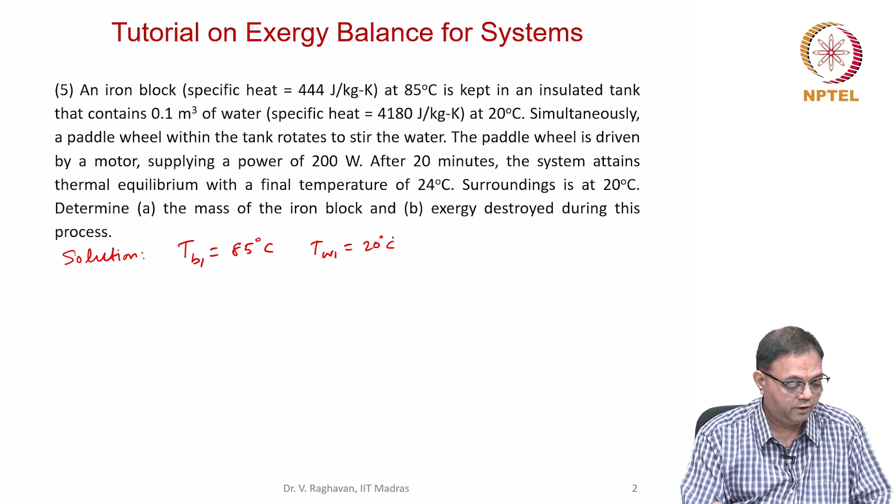The block's initial temperature is 85 degrees centigrade, the water's temperature is 20 degrees centigrade, the final temperature for both is 24 degrees centigrade and the ambient temperature is 20 degrees centigrade, and the volume is 0.1 meter cube, and the specific heats are given. For the block it is 444 joule per kg Kelvin, and for the water it is 4180 joule per kg Kelvin.

So, for the iron block, first law is applied, Q minus W equal to delta U, where it's insulated. So, the system is iron block plus water tank. Both together insulated, so Q equal to 0. So, minus W equal to delta U.

So, now W paddle, that is stirrer work, is 200 joules per second, that is 200 watts power, into 20 minutes into 60 seconds per minute. So, that will be equal to 240,000 joules.

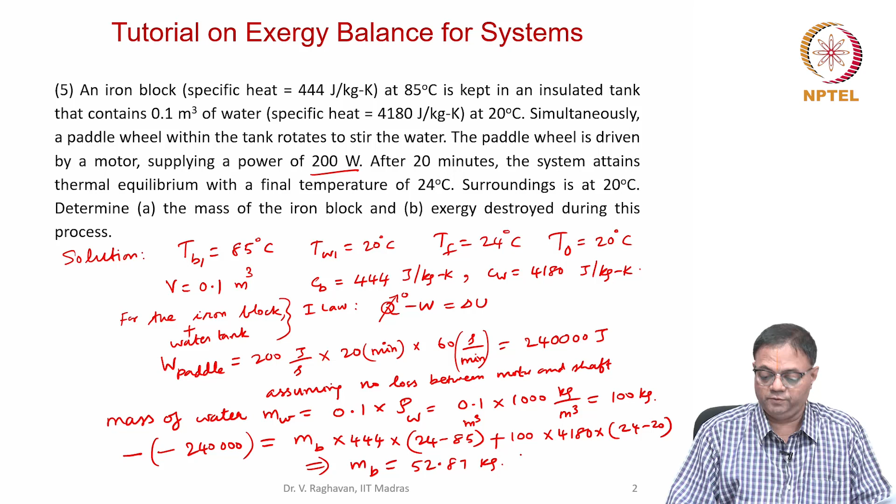So, from the first law I can write minus W, so minus of minus 240,000 joules. Please understand this minus sign comes because work is done on the system, equal to M_B, the mass of the block, into C into delta T, which is 24 minus 85, plus for water M_W is 100 into its C, 4180, into 24 minus 20. So that will imply the mass of the block is 52.87 kg. That is the first part of the problem.

Second part, entropy balance. The entropy generation Sgen will be equal to the entropy change for the block plus entropy change for the water. Now we know the mass, so I will say M block C block into ln of T final by T block initial plus M water C water into ln of T final by T water initial. Now you can see that this temperature has to be in Kelvin here.

So 52.87, which we have calculated, into C is 444 into ln of T final, 24 plus 273, so 297, divided by initial temperature 85 plus 273, plus 100 into 4180 into ln of T final 297 divided by initial temperature of water 20, so 293. So this will be equal to 1282.87 joule per Kelvin. That is the entropy generation.

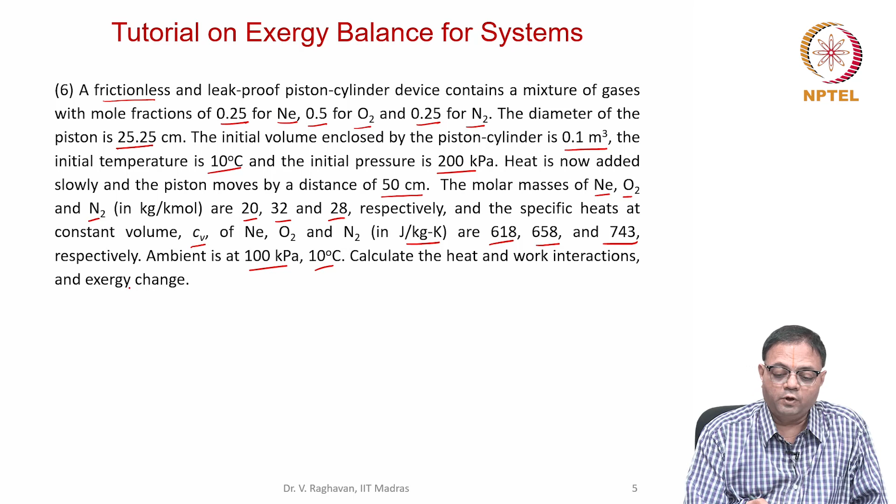So it's an ideal gas mixture. So here first we will find the molecular weight of the mixture, which is equal to sigma i equal to 1 to n, xi times molecular weight of i. So here it will be equal to 0.25, mole fraction of neon, into molecular weight of neon, that is 20, plus 0.5 into 32 plus 0.25 into 28, which turns out to be 28 kilogram per kilomole.

Now I can calculate the specific gas constant of the mixture, R mix, equal to the universal gas constant divided by the molecular weight of the mixture, which is equal to 8314 joule per kilomole Kelvin divided by 28 kilogram per kilomole. So which is equal to 297 joule per kg Kelvin, the specific gas constant of the mixture.

So let us see that the specific heat Cv is given in joule per kg Kelvin. So Cv mix can be found as sigma i equal to 1 to n, mass fraction of this component multiplied by the specific heat at constant volume of the component. So this has to be summed up. Here the number of components n is 3. So we have to find the mass fractions.

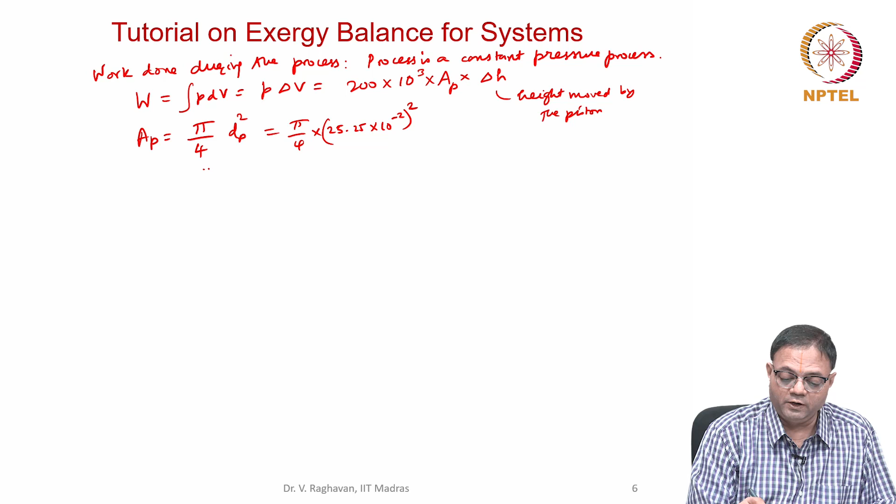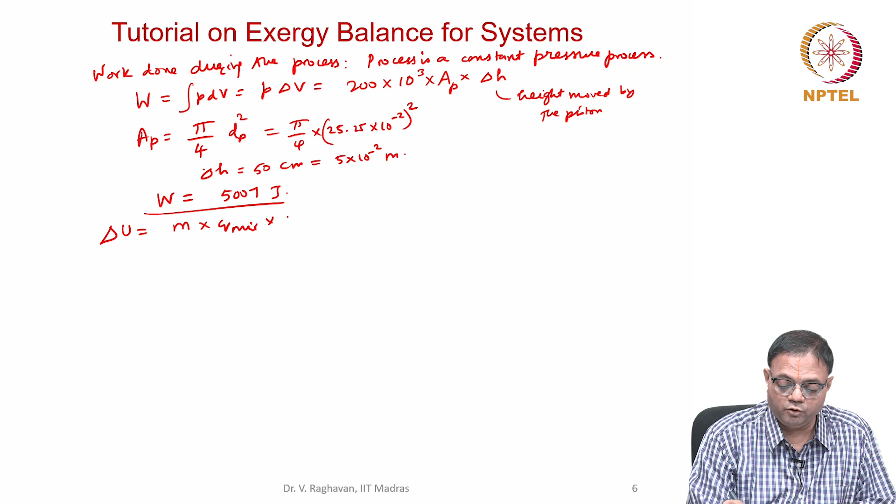Then delta H: the piston moves up by 50 centimeters, which is equal to 50 into 10 power minus 2 meters. So substituting that, I will get W as 5007 joules. Now change in internal energy delta U will be equal to mass of the system into Cv mix into T2 minus T1.

So, I have to find mass and I have to find T2. T1 is known, Cv mix is known, so I have to find these two. So, how to find mass? Mass of the system can be found by using the equation of state, that is PV by RT, here R mix into T.

So, here this will be equal to 200 into 10 power 3 into volume. Volume is given as 0.1 in the problem. So, go back and see, initial volume is 0.1 meter cube, divided by R mix, calculated as 297, into the initial temperature, 10 degrees, so 273 plus 10. So, that will give the mass as 0.238 kg.

So, then T2, how will you find T2? T2 can be found, again from the equation of state, as P2V2 divided by mass of the mixture into R of the mixture. Okay, so pressure remains constant. So, initial pressure is equal to final pressure, that is 200 kilopascals into, what is the volume?

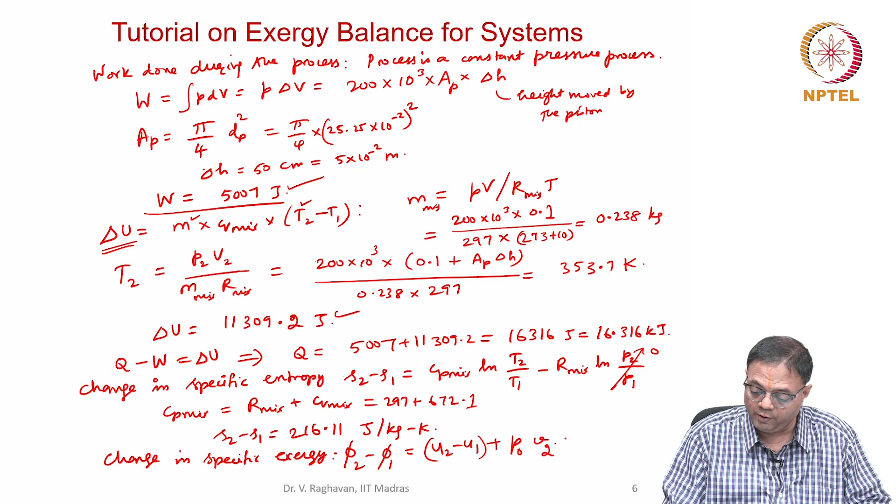So, why I need change in entropy? Because I want to calculate change in specific exergy, which is equal to Phi2 minus Phi1, which can be written as U2 minus U1 plus P0 times V2 minus V1 minus T0 times S2 minus S1, the change in the exergy between the final and initial states.

Okay, now this can be written as: U2 minus U1 is nothing but Cv mix into T2 minus T1, plus P naught, which is 100 kilopascals, so this into 10 power 3 into V2 minus V1, that is V2 by m minus V1 by m.

Minus T naught. T naught is given as 10 degrees centigrade, so that is 283, into S2 minus S1, which we have calculated. So substituting the values, I get exergy change as 28367.34 joules. So you can see that because heat is added, the exergy has increased from state 1 to state 2.

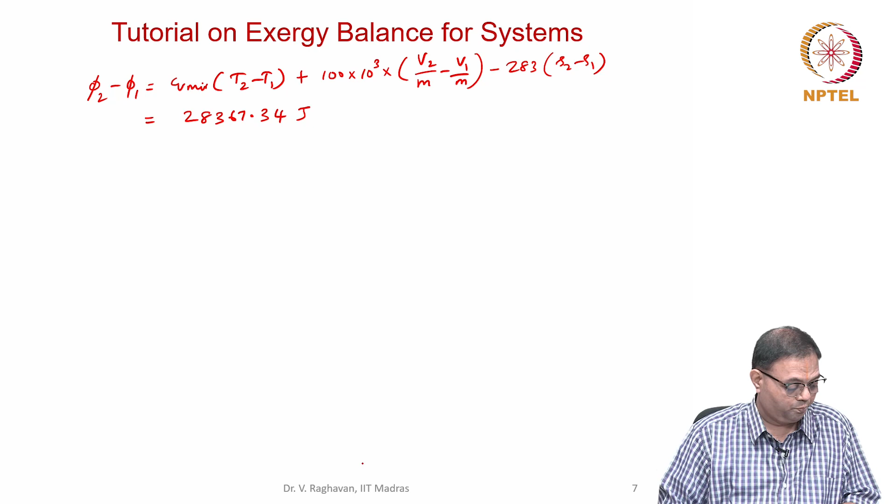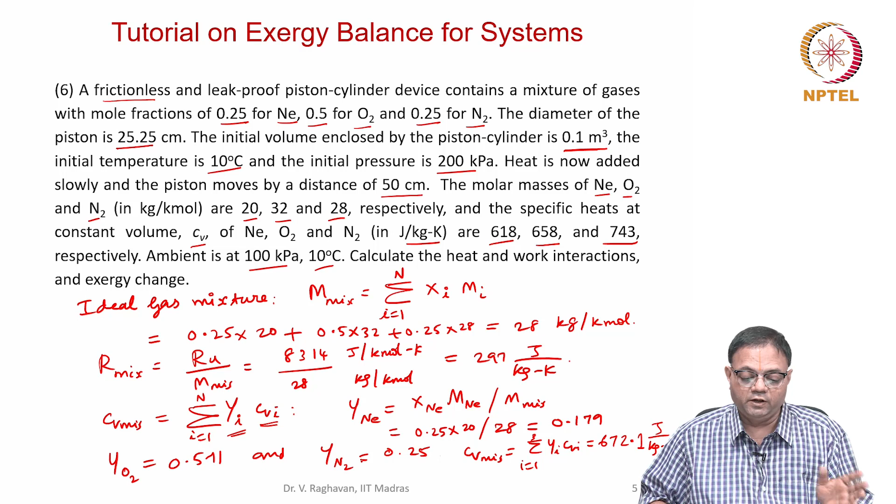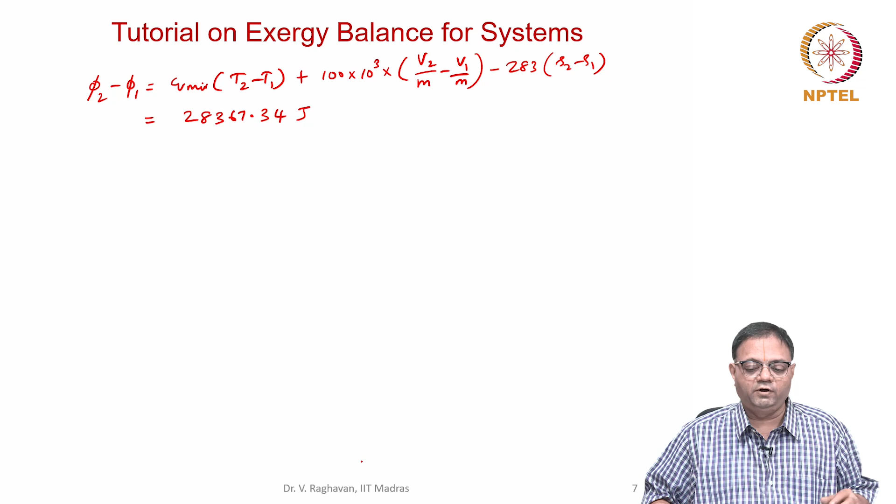So this is about this problem. So again, this is a system level problem where in a piston cylinder device, a mixture of gases is heated from initial temperature of 10 degrees to final temperature, which is calculated as 353.7 Kelvin, and due to which the exergy has increased. Some positive work output of 5007 joules has also come out.

So now we will go to exergy balance for control volumes. Here, the seventh problem: air is compressed steadily from 100 kilopascals and 17 degrees, the initial entry state, to 600 kilopascals and 167 degrees centigrade. You can see the increase in pressure and temperature due to the compression, at a rate of 2.1 kilogram per minute. Okay, so this is the flow rate of the air.

It's a steady flow. The power input for the compressor is 8 kilowatt, supplied from the surroundings to the compressor. Neglecting the changes in the kinetic and potential energies, determine the second law efficiency of the compressor. The surrounding temperature is given as the initial state temperature of 17 degrees centigrade. So this is the problem solution.

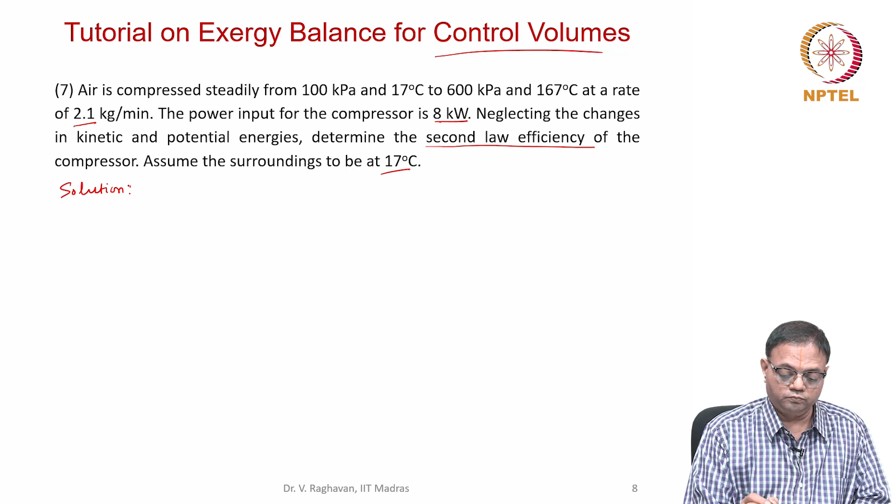First law can be written as Q dot minus W dot equal to M dot into H2 minus H1. The kinetic energy and potential energy changes are neglected.

Okay, now Q dot is not known. It is not given that the compression process is adiabatic, so that means we cannot just neglect Q dot here. But the power input is given, 8 kilowatts. So we can substitute: Q dot minus 8 kilowatts, that is 8000 watts. It's a power input, so I put a negative sign here, equal to M dot.

M dot is given as 2.1 by 60, that is 2.1 kilogram per minute converted into kg per second, into Cp. Cp we can take as 1005, that is Cp into T2 minus T1. This is 440 Kelvin and this is 290 Kelvin. So substitute everything, I get Q dot straight away.

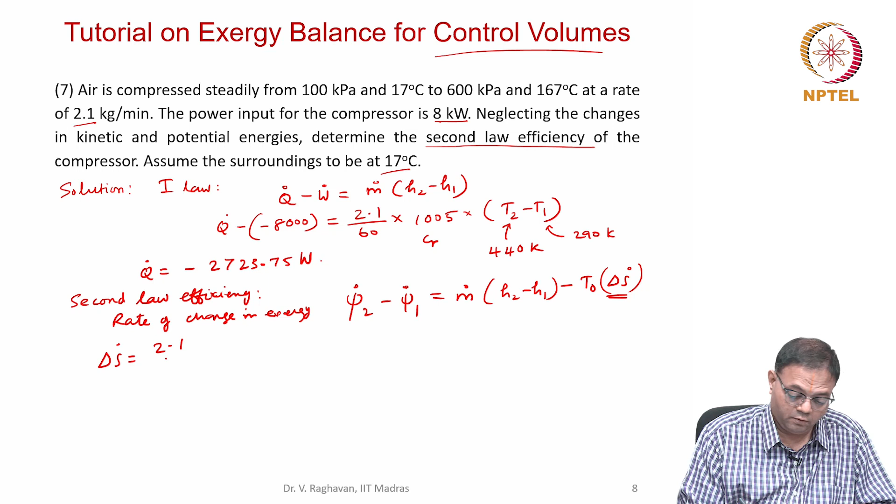Delta S equal to 2.1 by 60, that is the mass flow rate, into Cp into ln T2, 440, divided by T1, that is 290, minus R, 287, into ln of 600, the final pressure of 600 kilopascals, divided by 100, the initial pressure. So that is delta S. You can calculate delta S as minus 3.33 watt per Kelvin.

So, now we can get the change in the rate of exergy, which is equal to mass flow rate into Cp into delta T, 440 minus 290, that is H2 minus H1, minus T naught into minus 3.33, which we have calculated as delta S. This is T naught and this is delta S dot. So you get the value as 6241.95 watts.